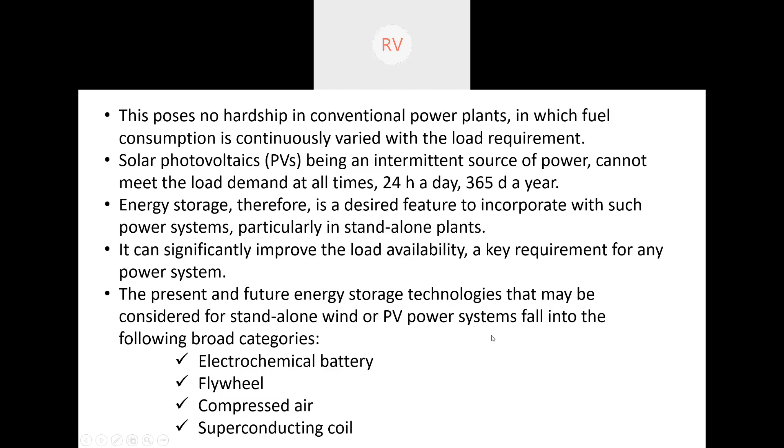So we are going for the second type of technology for energy storage, that is called a flywheel. Let's start. Yeah. So,

it is a slightly different type of concept than the batteries which we have learned. This stores mechanical energy, that is, it stores kinetic energy. So, the flywheel stores kinetic energy in a rotating inertia. We know what inertia is, right? Inertia is a state of being continuously in one state, whether it is inertia of motion or inertia of rest.

We know that, right? So basically the object continues to be at rest unless we give it an external disturbance, right? That is inertia of rest, basically. And again we have inertia of motion, in which we say that if the object is in motion and it is not being given any external disturbance, then it continues to be in motion infinitely. That is the inertia of motion, right?

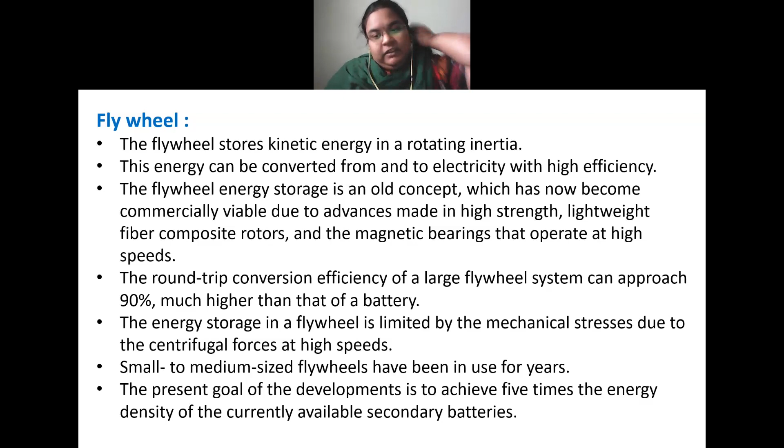Okay, so the present goal of the developments is to achieve 5 times the energy density of the currently available secondary batteries. So they are keeping a goal that we need to make a flywheel which has 5 times the energy density of secondary batteries, such that it contains 5 times more energy than a secondary battery. That is the present goal of the developments.

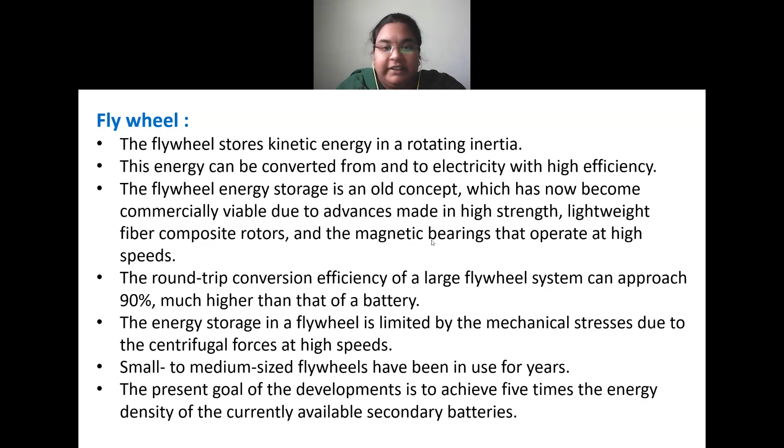Now, the flywheel system is made of a fiber epoxy composite rotor supported on magnetic bearings, rotating in a vacuum and mechanically coupled with an electrical machine that can work as a motor or a generator.

He is just telling us what are the different components present in the flywheel system. The first thing he's saying is it is a fiber epoxy composite rotor. We have a rotor that is supported on magnetic bearings.

Bearings are nothing but the ones you might have seen in your cycles or in fans or anything. You will be having small balls on which the total rotating system will be there in order to reduce the friction. In the same manner we also have bearings in case of flywheel, but here they have a different property, which is nothing but the magnetic property.

We have magnetic bearings. Now, the total system is rotating in a vacuum. Why are we going for a vacuum? Again, to reduce different external factors. In vacuum, whatever the type of energy or motion is there, you can find it at its highest efficiency, right? So in order to make sure that we are getting the highest efficiency, we are rotating all this in vacuum, and it is mechanically coupled with an electrical machine that can work as a motor or as a generator.

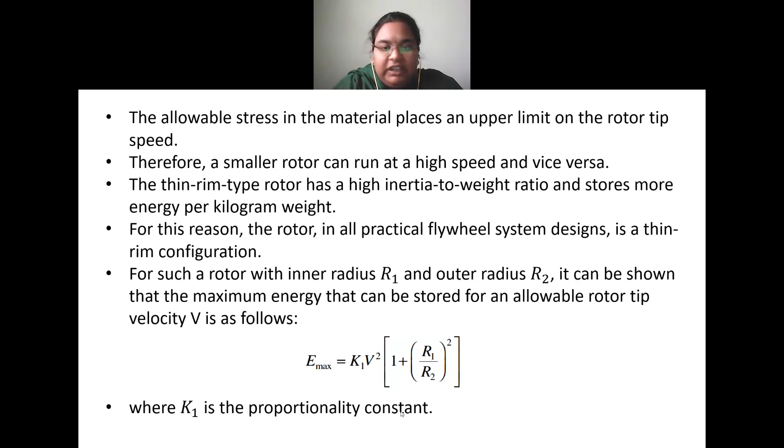Now, the thin rim flywheel with ratio r1/r2 approaching unity results in a higher specific energy for a given allowable stress limit. He's just giving us different understanding of the nature of these things.

Here, he's saying that in a thin rim flywheel, if the r1/r2 ratio approaches unity, what does that mean? r1 and r2 will be almost equal. If that happens, it results in a high specific energy for an allowable stress limit. So it will be having high specific energy.

The higher the ultimate strength of the material, the higher the specific energy. So as the strength of the material increases, the amount of the specific energy also increases. The lower the material density, the lower the centrifugal stress produced, which leads to a higher allowable speed and specific

energy. So if the material density is low, that means there will be less centrifugal forces produced, and because of that the speed at which the rotor can rotate will be increased, and because the speed of the rotor is increased, the specific energy of that rotor will be increased. That is what it is saying.

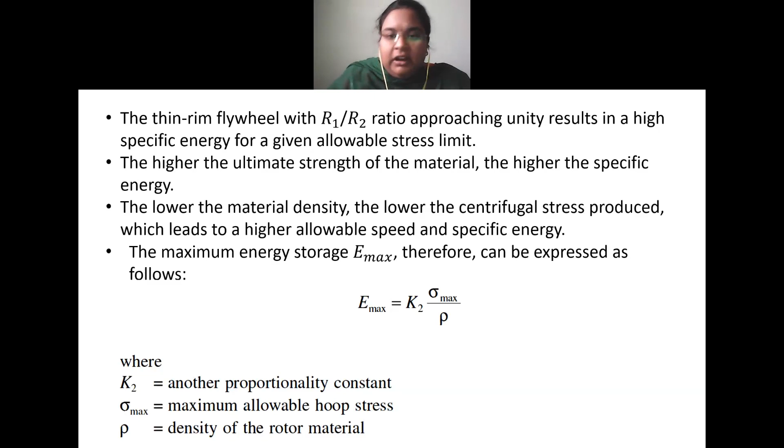Emax is directly proportional to sigma max by rho, and that is again directly proportional to the specific energy. If you have a high specific energy, you can store high amounts of energy. That is what he's saying. If you have low specific energy, that means your capacity to store energy will also be less.

Next, in addition to the high specific energy, the composite rotor has a safe mode of failure as it disintegrates into fluff rather than fragmenting like the metal flywheel. So what it is saying is, if you are using fiber epoxy polymers as your material, if they start to disintegrate, they will not break into pieces. It will be like a fluffy material, all the fibers will be extracted, and it will become a rather messy thing rather than the breaking of the metal flywheel.

So because of that, what we need to make sure is that we have a safe mode for failure. We need to make sure that there is some mechanism which will stop the flywheel as soon as it reaches its safe value.

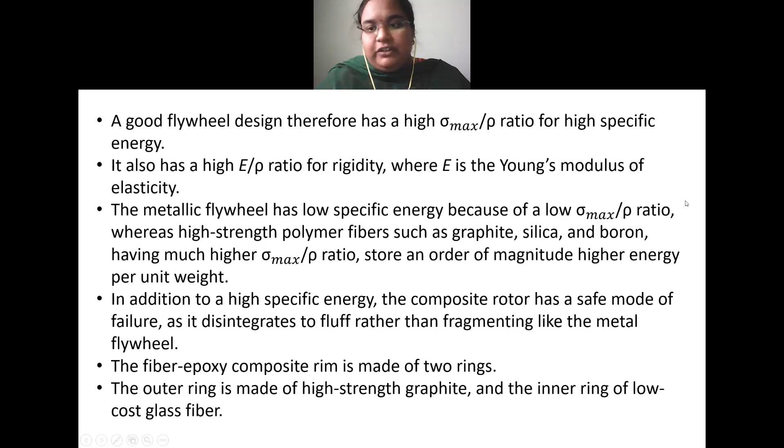That is why we are doing this: it is because of the disintegrating nature of the epoxy resins. Now, the fiber epoxy composite rim is made of two rings. The outer ring is made of high strength graphite and the inner ring of low cost fiber.

Here, even before going into this one, we have the maximum specific energy storable in a thin rim flywheel with various rim materials. He is just showing us the amount of energy, or how many watt hours, that can be stored per 1 kg of different rotor wheel materials. You can see different rotor wheel materials on your left hand side, and on your right hand side you can see the maximum specific energy storable.

Now you can see that the polymer fiber composites have 350 watt hour per kg, which is much higher than maraging steel or aluminum alloy, right? And the fused silica fiber composite has 1000 watt-hour per kg, which is very much higher. The specific energy storable is very much higher in the case of a fused silica fiber composite.

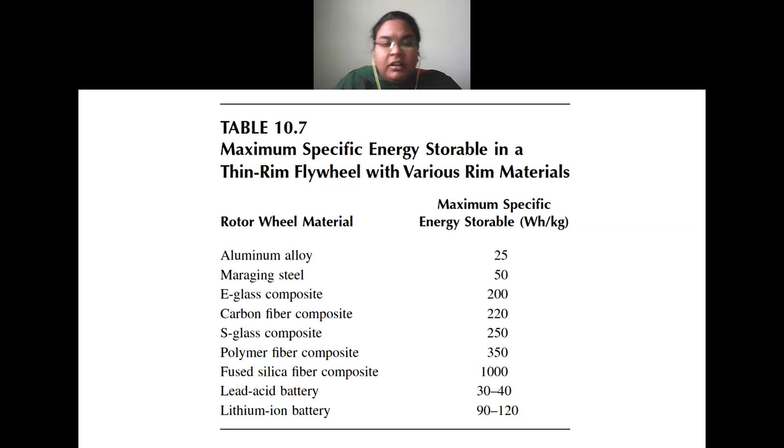And just for our comparison, he has given us the lead acid battery as well as the lithium ion battery. You can see lithium ion battery and lead acid battery have very less specific energy storable, right? For the lead acid battery it's just 40 watt hour per kg, whereas for the lithium ion battery it is up to 120 watt hour per kg, which is very less than what we see in the case of composite fiber rotor wheels.

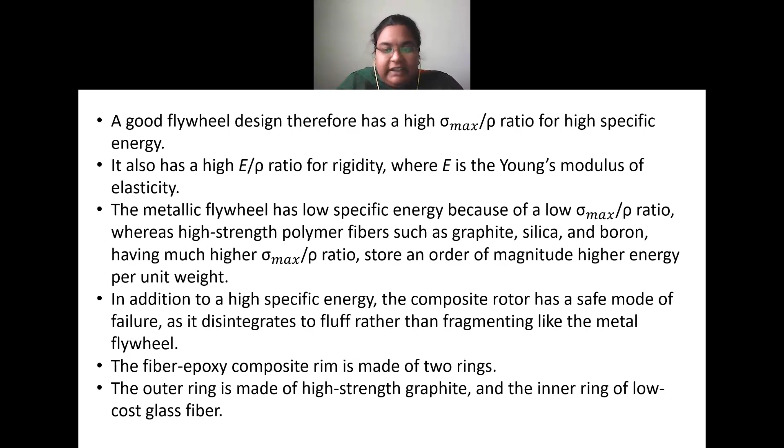Now he is going to tell us how this total mechanism works and how the total structure is. The fiber epoxy composite rim is made of two rings. The outer ring is made of high strength graphite, the inner ring of low cost fiberglass. So this is how the rotor will be. This is one of the designs of the rotor, in which you will be having two rings. The outer rim will be for strength, made of graphite, and the inner ring will be made of glass. This is for getting the maximum amount of energy storage.

And the hub is the case in which we are going to put this: single piece aluminum with radial flexibility to relieve the interface. Whatever is in between, connecting all those things, that is the hub. That is what he's talking about. This is the total structure of the flywheel mechanism. The hub is made of single piece aluminum in the radial spoke form. That is what we have seen.

Such a construction is cost effective because it uses costly material only where it is needed for strength, that is, the outer ring where the centrifugal force is high, resulting in a high hoop stress. Because of this two ring mechanism, we are using graphite only on the outer rim for strength, and glass in the inner rim, so that we reduce the cost of production of the total system.

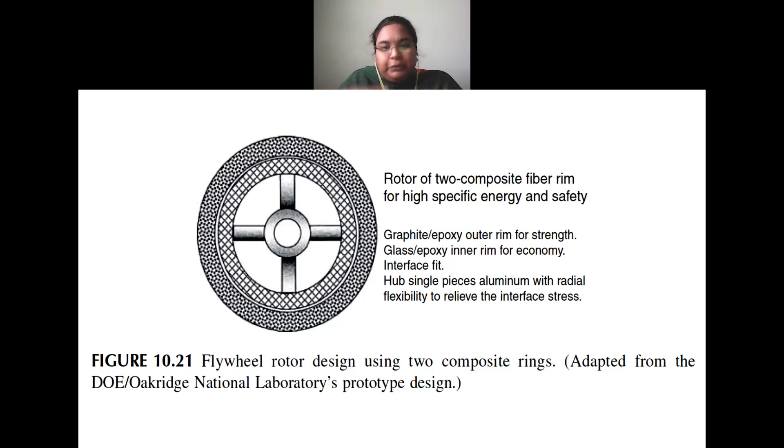Okay, the complete flywheel energy storage system requires the following components. He is just telling us the different components required for the flywheel energy storage system. The first one is the high speed rotor attached to a shaft via a strong hub.

Okay, we know that. Next, bearings with a good lubrication system, with magnetic suspension in high speed rotors. Here we need to make sure that the bearings we use do not produce any frictional force. They should have a good lubrication system so that there is no frictional force, for the smooth operation of this rotor.

Next is the electromechanical energy converter, usually a machine that can work as a motor during charging and as a generator while discharging the energy. Here you need to understand that the rotor will be charged when it is rotating. So in order to rotate the rotor, it should act as a motor.

That is the main issue. Okay, power electronics to drive the motor and to condition the generator power. There are different systems in general. One of the systems is the power electronic drive. This drive will have a power electronic system as well as a machine, and those two will be integrated together, which is called a drive.

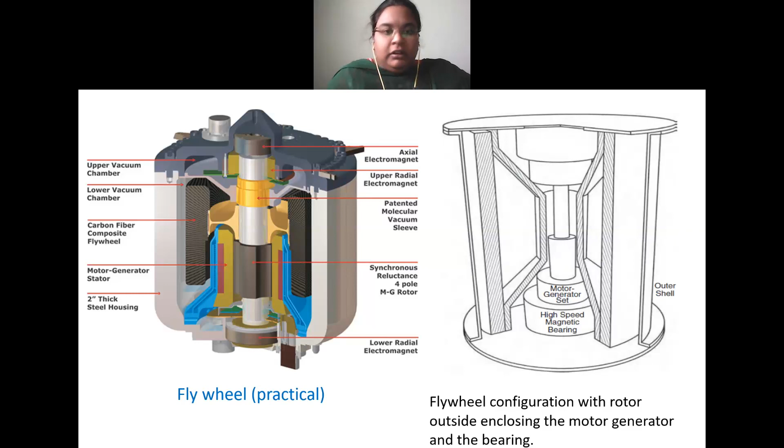So, next is the superconducting magnet, the superconducting technology. Okay, we'll see what a superconducting magnet is.

Before even going into this, I don't think you have completed your magnetic circuits, right? Is it over? Magnetic circuits is not over, or is it over? Just message me. Okay, even if it is not over, we can't do anything right now.

So let's continue. There is a technology called superconductor technology, which is also used for storing energy. It can store any type of energy as usual: we can store thermal energy, PV energy, wind energy, whatever type of energy you want, you can store it. Okay.

Now, how is this done? How does this superconductor technology work and what is the superconductor? All these things we'll see. In its working principle, the energy is stored in the magnetic field of a coil and is given by the following expression. We know that in an inductor there will be energy stored.

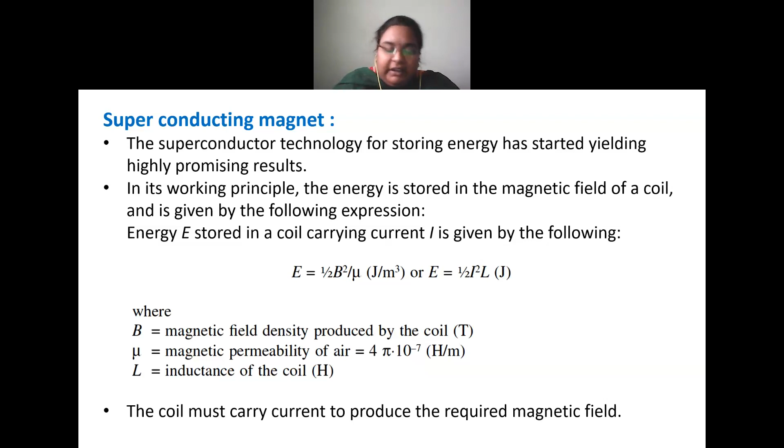Okay, so this is the formula. For our convenience, let's go for half LI square. That is more convenient and more real for us. So energy stored is given by half LI square. Now, the coil must carry current to produce the required magnetic field. We know that, right? In order to carry the current, there should be some voltage difference between the coil terminals. That is what it's saying. The current requires a voltage to be applied to the coil terminals.

Now let us say that both of them are there. There is a voltage difference and the coil is carrying a current. Because of the current, you are having a magnetic field around the coil. All this has been satisfied. Now, the relation between the coil current and the voltage is given as V is equal to Ri plus L into di by dt. R is the resistance of the coil, L is the inductance of the coil, and di by dt is the change in the current in the coil.

So, for storing energy in a steady state, the second term in the equation must be 0. In order to store the energy in steady state, there should not be any change in the current. Di by dt will be 0. If you make di by dt as 0, then the voltage required to circulate the needed current will be simply V is equal to Ri.

So you will be having only V is equals to RI. The resistance of the coil is temperature dependent. For most conducting materials, it is higher at higher temperatures. As the temperature increases, the resistance also increases. In certain materials, the resistance abruptly drops to a precise zero at some critical temperature.

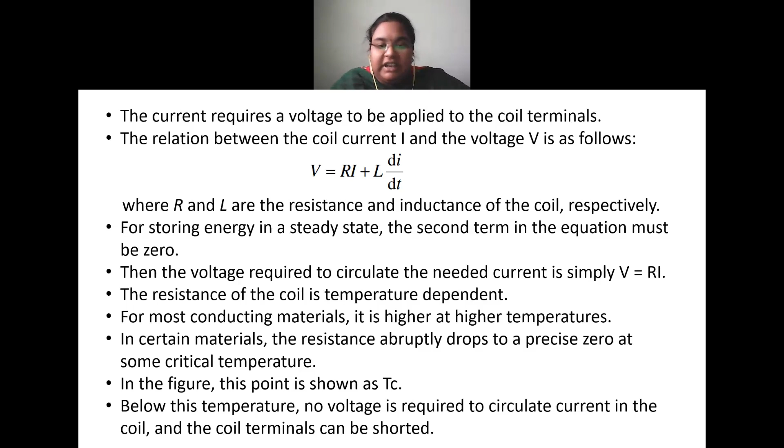Why is he saying that? Because there is no resistance, we need not push the current from one point to another point. So if you are not needed to push the current from one point to another point, there is no requirement of voltage, right? That is what he is saying. The current continues to flow in the shorted coil indefinitely, with the corresponding energy also stored indefinitely in the coil.

So because of this nature of this material, where the resistance is becoming zero, we need not have any voltage to drive the current from one point to another point. So the current in the coil itself flows indefinitely. Because of the continuous flowing of this current, the magnetic field produced by the coil will also be continuously present. It will be stored continuously. That is what he is saying.

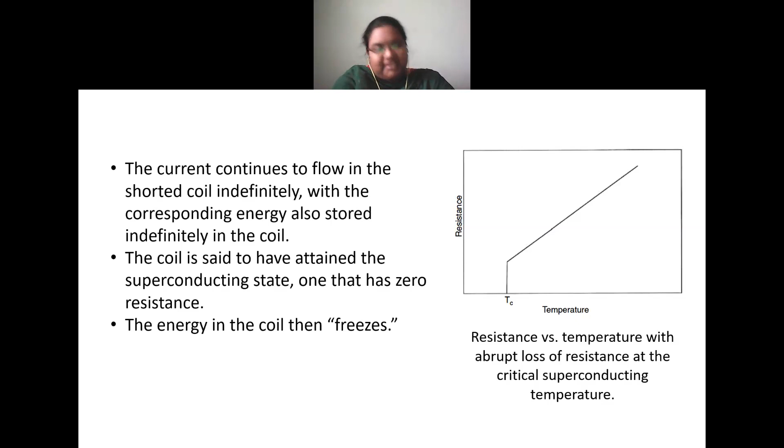The coil is said to have attained the superconducting state, one that has zero resistance. So when this happens, the coil is said to be in the superconducting state, where there is zero resistance. The energy in the coil then freezes. Freezes in the sense it is constant. It cannot be changed. That is what he means. So in this way, we are making sure whatever energy is present in the coil is present indefinitely. Okay.

How they do that, you will understand when you study all the 4 years of your engineering. Okay, but for the time being, understand that everything will be controlled by a system.

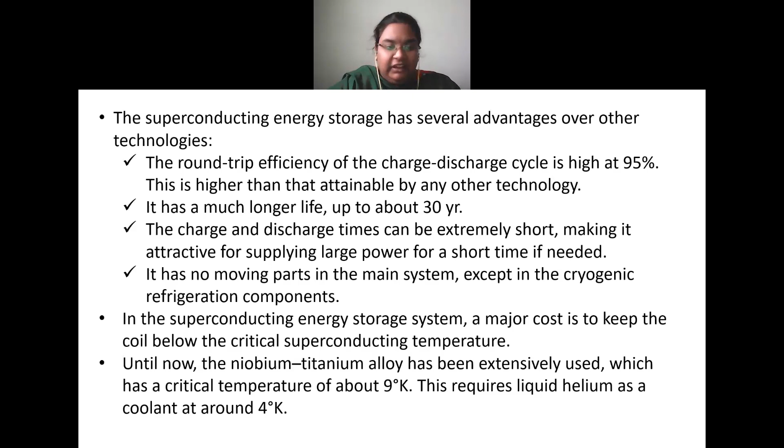So just by understanding this 9 degrees Kelvin and 4 degrees Kelvin itself, you can see that the major cost is going for the temperature maintenance of the superconducting materials.

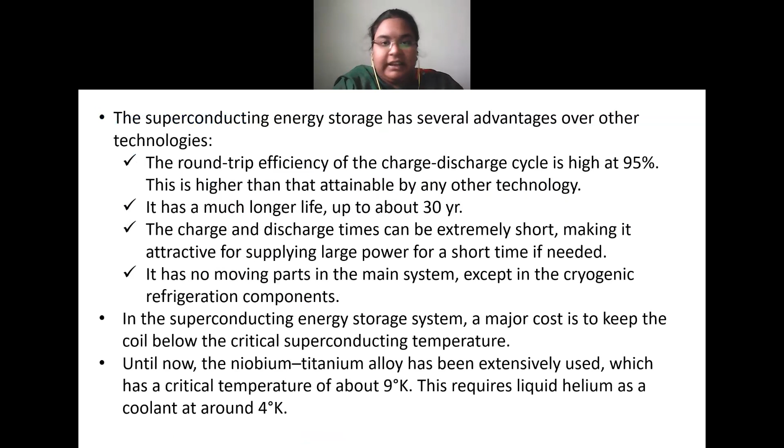So these are the two topics for today's class, and we have one more topic on the types of energy storage itself, that is the compressed air technology. Let's discuss this in the next class so that it will be neat, and I can give you more information about that. So that's it for today's class.